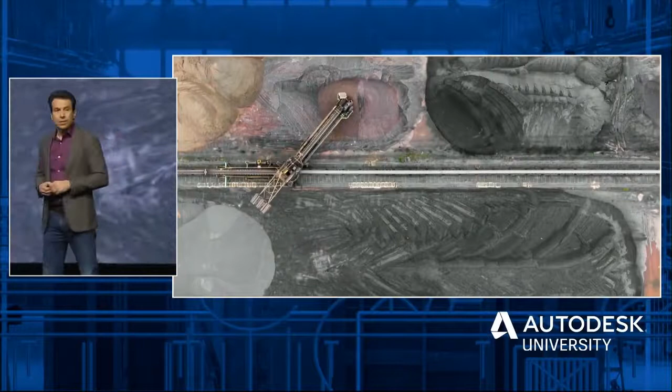On the one hand, we know that a growing population is inevitable, as is a world with more automation, because so much more is needed. But at the same time, we fear there will be fewer jobs and less of our planet's scarce resources. So what do we know about our future with any certainty? We know that more and more people are joining the middle class every day. Over half the global population can be considered global middle class today.

Now, I know there are many definitions of what middle class is, but whatever your definition, the fact that 4 billion people enjoy mobility and prosperity is enormously good news. But with this increasing prosperity comes increasing demand for more housing and hotels, more automobiles, and more airplanes. We know that more is inevitable. Yes, as we make more things for more people, we also know that we create more potential for negative impact. And making all we need with less harm to the planet and to people is a reality that we all need to face up to.

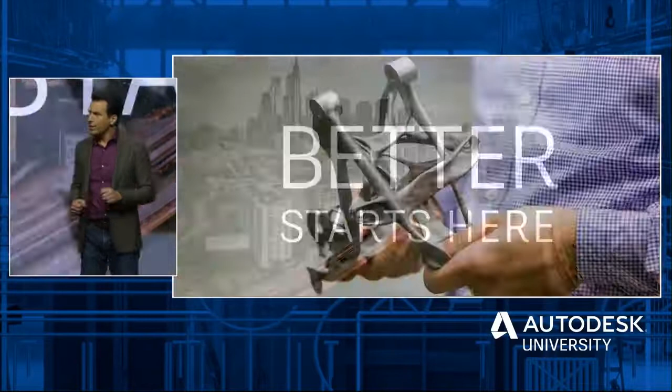So how can we solve a problem of such enormity and such complexity? It's a massive challenge, but it's also a massive opportunity, especially for all of us here in this room. I believe that better starts here. And let me tell you what I mean by better and how technology can help us get there. There are 3 areas I think we all have an impact on, and they're all completely interrelated.

First of all, we have the opportunity to better use the world's energy and materials. You've heard me talk about using less, and yeah, that's part of it, but it's also about better. More renewable energy and more circular materials. Our energy and material choices ultimately impact people. But if we can make our dependence on fossil fuels a thing of the past and build a world where people everywhere benefit from clean air,

better is also about the health and resilience of the entire population. That means designing products without harmful materials that compromise our safety or using supply chains that compromise people. It means designing buildings that prioritize health and well-being, and designing cities that are resilient in the face of climate change.

And finally, we all know that automation is changing jobs, but it's also creating the opportunity for more meaningful work, better work, and a path to prosperity for more people. Together, we have an opportunity to create a more sustainable, more equitable, and more prosperous future. A future that's better for the growing middle class, but also for those still striving to get there.

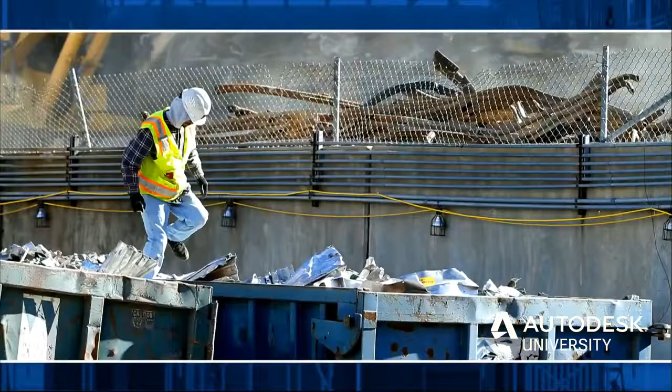So let's take a look at what these 3 aspects of better look like in construction, manufacturing, and media and entertainment. Now we'll start with construction. Now we all know today construction creates about 1/3 of all global waste. If we are to build what our growing population needs, we can't keep wasting energy and materials the same way we do today. We need to fundamentally rethink the way we build.

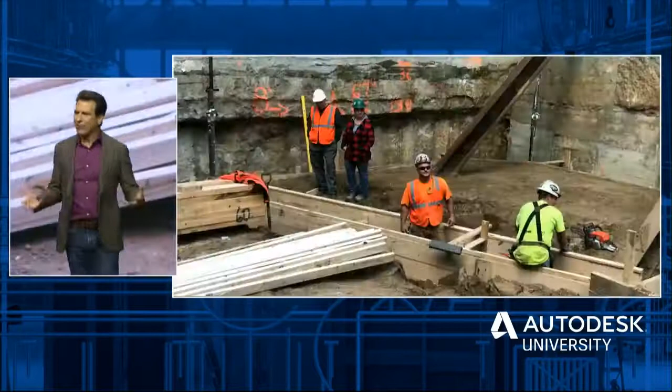Now, one company doing just that is Marriott. Marriott is the world's biggest hotel chain, and their revenue is increasing, their pipeline is growing, they're opening more properties than ever before. There's just one problem. Marriott has a huge bottleneck. They can't build what their growing business demands. Now, why is that? Because half of the US construction workers are now over 45. And the job is seen as just too dirty, dangerous, and dull to many younger workers.

This lack of skilled labor over the last decade is why the average US hotel has taken longer and longer to build. So 5 years ago, Marriott set out on a journey to learn how modular construction could help. Since 2014, they've built more than 30 low-rise modular properties, and the last year, they were ready for a big leap. At 26 stories, the Nomad Hotel in Midtown Manhattan is certainly big, as is the $65 million Marriott is investing. It will be the world's tallest modular hotel. But this isn't about creating a big hotel. It's about creating a beacon for the whole industry.

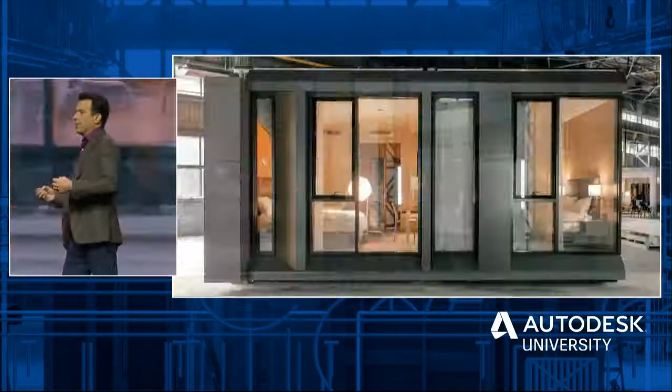And their partner for this is Skystone. Now, back in 2014, Skystone was a pretty small company, but the way they thought wasn't. They design modules that are volumetric. This means they get fully fitted out in a factory with less material, less waste. And they make them as steel frames, which means they're more configurable, and less concrete is needed to install them together on site. In theory, the economics stack up just as well as the modules themselves. But theory only gets you so far. Skystone wanted to put this into practice using automation to drive efficiency across all phases of the hotel's construction.

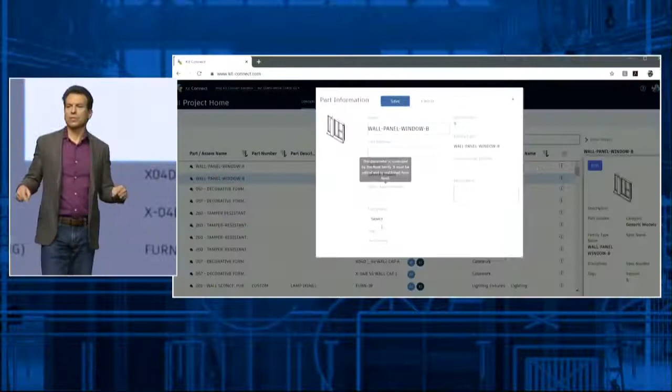And central to Skystone's automation effort is Revit. They used Revit to develop a library of parts that can be mixed and matched to spec, using a service built on our cloud development platform, Forge. Now that service is called Kit Connect, and it's used to publish component libraries to the cloud from where they can be assembled and configured into a single central model.

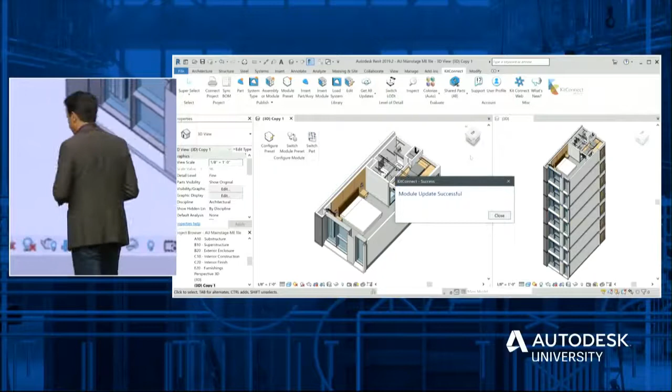So if a component like a window is swapped out, the bill of materials for each module remains consistent and accurate, because the changes propagate through the Revit model and to any other tool referencing it, like BIM 360, which Skystone is using to share 3D documentation across all phases of the project, making all the information available to all the trades when they need it. And Skystone has just started to use our pre-construction tools to keep their bidding as tightly managed as their factories.

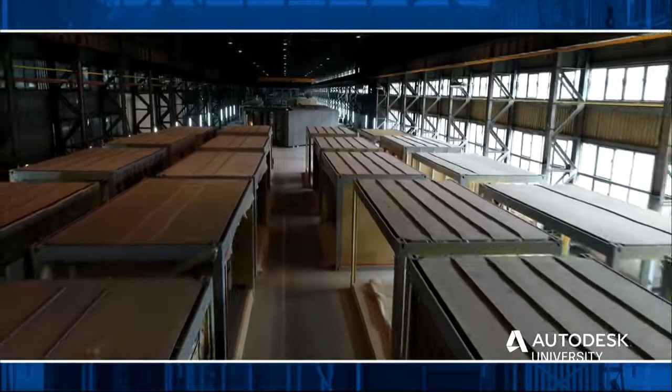As Marriott scales up its investment in modular, so Skystone has to scale up its manufacturing in parallel. These modules aren't constructed, they're manufactured. There's an assembly process, a supply chain, and tight quality control, with less waste, less cost, and less risk. They're using robots for what robots are good at, the dirty and dangerous job of welding the steel frames, and they're using people for what people are good at. Like, for example, the high-end finishes in Marriott's modules require people's expertise and attention to detail.

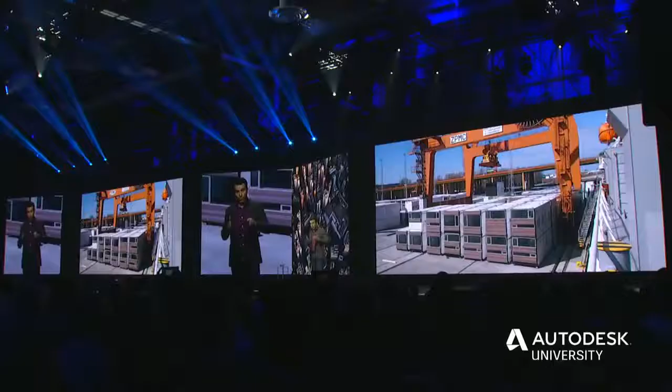All 168 modules will soon be on a single container ship on their way to the port of New York. From there, they will be trucked overnight, one by one, to a plot that is just as tight as the rest of Midtown. So tight, in fact, it would be really difficult to get traditional materials onto the site. But trucking them in from the port is straightforward, as is craning them into place, hanging them off the concrete core, and hooking them up to the services. Over half the work is still done on site, but the work has changed for the better. It's simple, it's predictable. Now, the Nomad Hotel is on track, it's on time, and it's on budget, and it's due to open next year.

Now, all building projects involve the juggling of energy and materials, of time, cost, and quality. And Skystone has partnered with Marriott to build hotels of better quality in less time with less cost. But beyond that, there's also less disruption to the neighborhood, less noise, less dirt, less wasted materials. And because each module is insulated individually, they're quieter, and they're more energy efficient. Because of the building's performance, Marriott qualified for a floor space credit. The city granted them an extra 5,500 square feet that will become a rooftop bar. It'll make the hotel more attractive, bring more guests, and more revenue.

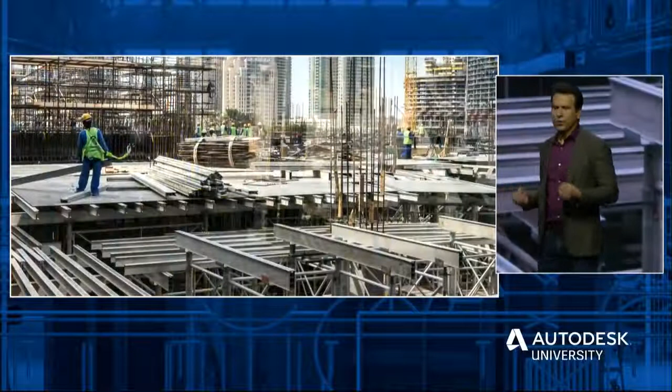Now, maybe you're not building high-rise hotels, but if modular can do this for Marriott, just imagine what it could do to help you use energy and materials more efficiently. You know, rethinking how we build the new hotels, new housing, and new infrastructure is very important, but it's just one part of a larger system. We also need to rethink how we repair our existing housing and our old crumbling infrastructure. At the same time as we build the new world, we're going to have to rebuild the old.

Now, to talk to you about this, I want to invite up the CEO of Build Change, who is bringing economic health and resilience to communities around the world. Please welcome Elizabeth Hausler.

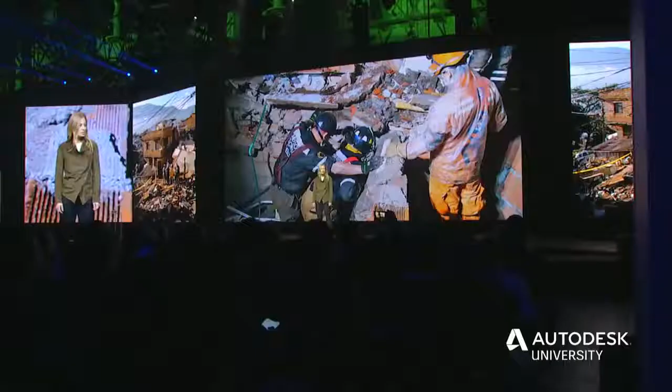A couple of months ago, a house collapsed in Medellin, Colombia, killing 3 people. There was no earthquake. It was just a normal home, just more heavy and less reinforced than it needed to be, just like hundreds of thousands of brittle brick buildings throughout the emerging world. But a house collapsing under nothing but gravity loads is a canary in the coal mine.

Because when a house like this collapses, the people who live there lose not only their home, but also their source of income. In places like Medellin, families often run a business, like a store or a restaurant, out of their home, or maybe they rent out a second story for income. When the big one hits Medellin, or Jakarta, or Manila, or Bogota, or Guatemala City, or Tehran, the loss of life, the loss of housing, the loss of economic progress, the loss of social progress will happen on a much larger scale.

What's this got to do with me? I grew up in a small town outside of Chicago, and my dad built houses. He owned a small construction business and worked for 50 years as a brick mason.

And he and my mom are here in the audience. Thanks, Mom and Dad.

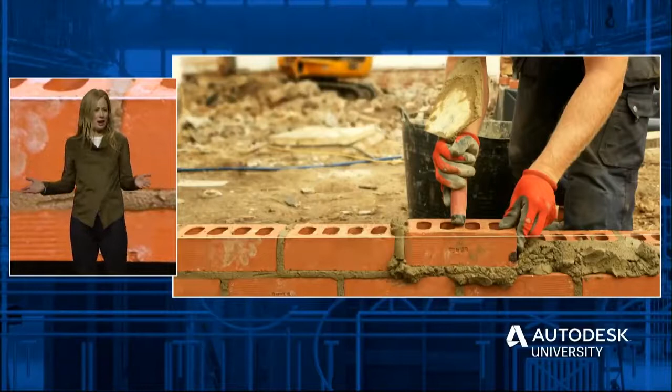So guess what my sister and I did for our summer jobs? We laid bricks. We built houses, just like my dad. I loved working with my hands, building things, being out in the fresh air, telling jokes on the construction site. Andrew, I didn't find my construction job to be dirty, dangerous, or dull. I could see what I'd accomplished at the end of the day. We'd built a home. We worked hard for my dad, and goodness knows he worked hard for our family.

Neither of my parents had the opportunity to go to college, but for us, they saw a college education as an opportunity of better. They encouraged my sister and I to become engineers. When I was in grad school studying engineering, completely enthralled by the science and technology behind preventing buildings from being damaged in earthquakes, I found myself still looking for purpose.

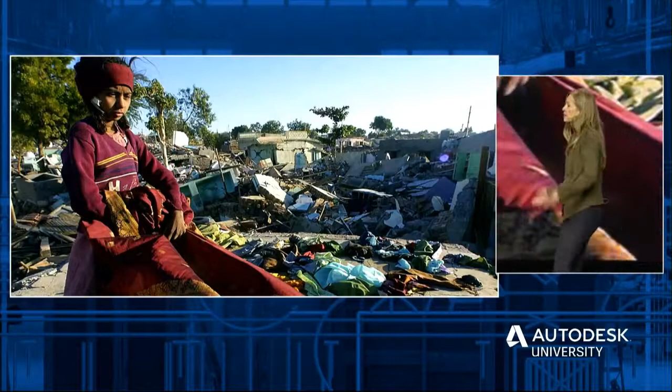Just then in 2001, an earthquake in Gujarat, India, killed 20,000 people. That's 4 or 5 times the number of people in this room, gone in less than a minute with no warning. And the majority of those killed, women and children. Most people died because their unreinforced stone masonry building collapsed on them. This is a man-made problem. I realized maybe I could help. Maybe I could use my engineering and my construction skills for good.

I spent a year in India on a Fulbright fellowship, an idealistic engineer, thinking, of course, we can design and build disaster-resilient homes. But as I wandered around villages talking with homeowners, I realized that it wasn't that simple. I met families who had been given geodesic dome homes. Geodesic domes are great for earthquakes and wind, very secure. But they're not easy to live in. They don't have enough light. There's poor ventilation. There's no ability to divide the interior space.

I met homeowners with contractor-built houses who still slept outside 10 years after the earthquake because they were excluded from the design and construction process. They couldn't trust that their house was built safely, that enough cement was used in the concrete, that the structure was sound, that they could sleep at night.

We need to understand the materials and architecture that work for the culture and the climate and the client. If we are to build healthy and resilient communities, we need to respect how people want to live here and now. We make small changes to existing building types to make them safe and usable to the people living in them. Simply, we need to find solutions people want. Isn't that what designers do?

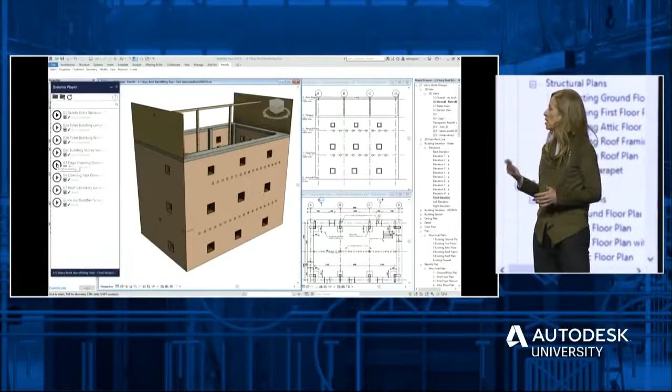We asked ourselves, how can we work with technology available now to make every step of the design and construction workflow shorter and more efficient for both new housing and for strengthening existing housing, retrofitting, where every house could be a little bit different. Today, using Revit and Dynamo scripts, we can automate retrofit design for like types of buildings. We code in Dynamo the structural engineering retrofit rules and use Revit to produce a complete design, a 3D model, bill of materials, cost, and construction drawings.

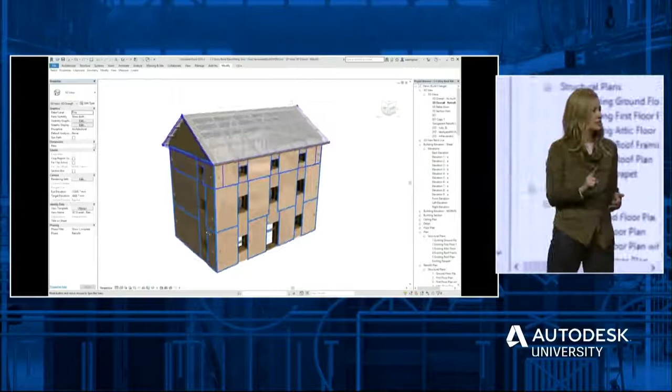What once took our team of 3 people 4 to 5 days now takes 1 person 3 hours. That's 97% less time. Even if every house is a little bit different, the design process is automated. But we think we can do even better. Here's what we're doing next, and this is really exciting. We're using artificial intelligence to change how homes are assessed.

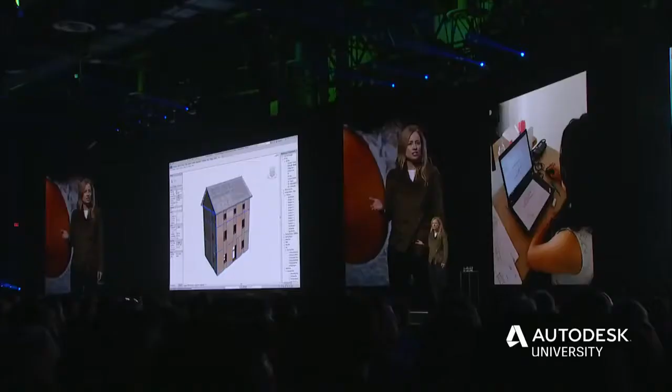It's time and resource intensive to send engineers and architects to visit every house, to make structural assessments, to measure the dimensions. We built a tool that uses AI to quickly assess whether a building can be strengthened or retrofitted. The tool uses photos that the homeowner takes on their smartphone and uploads to our cloud. It looks at things like the continuous length of solid wall, the proximity of wall to the corners, the length of wall between openings. We've trained the machine through image capture, and all that data then tells us if it's possible to retrofit the home.

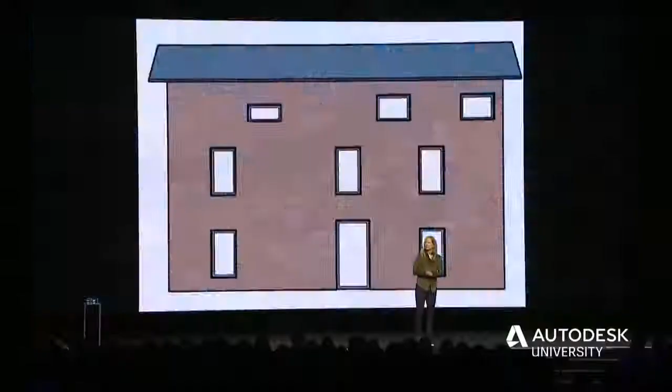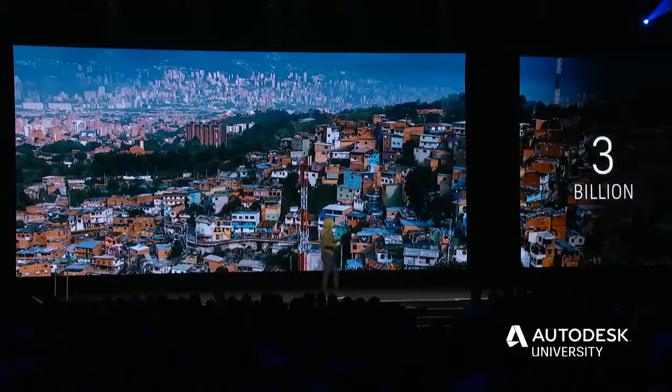These technology advances are key to scale, scaling our efforts and scaling our impact. Why? Because the World Bank says that 3 billion people will be living in substandard housing by 2030. 3 billion. That's 1/3 of the world's population. We're not just talking about the poorest of the poor. Lack of access to safe, resilient housing affects the bottom of the pyramid, up through the middle class, in our markets in Asia, Latin America, and Caribbean. If we're going to address the need for safer and better housing, we must move quickly, and technology is the key to unlocking that problem. The quicker we can assess and design a home, the quicker we can get to construction, and the quicker people can live safely in that home.

And that's not all. We'll bring better housing, but also better work to these communities. Local construction workers can access skills training and job after job after job to support their families, enabling them to build their own livelihood. But we have to be cautious here. Let's not let technology eliminate people from the design and construction process. Let's use it to enable them to make the choices that are right for their family. Using virtual reality, the homeowner can walk through the Revit model of their home and make design decisions, truly keeping those who will live in the home at the center of the design process.

Back to Colombia. Technology alone can't save the world. The government of Colombia knows that retrofits, strengthening homes, will help support their citizens. They know that preventing a disaster costs less than 20% of the cost of rebuilding after one. And they plan to invest more than $3 billion in government funds for housing. But we want to be sure that's safer housing. In partnership with Build Change, that investment can be taken much further.

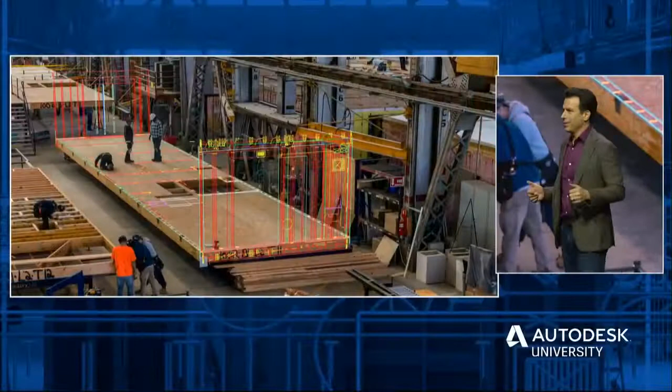So our material choices can put the health of entire communities at risk, or they can make these same communities more resilient. We have to make better choices in building projects and in all of our projects, because these choices ultimately impact people. Now, perhaps nobody knows this better than Volkswagen. The last few years have been dark times for Volkswagen. The emissions scandal was a difficult chapter in its history, but they've learned lessons from their past, and they are reimagining their future around electric.

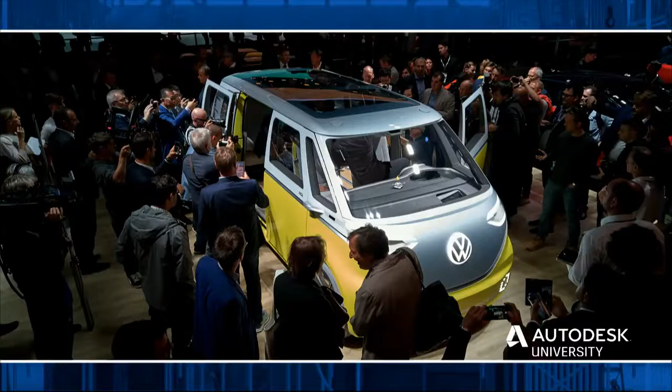They're spending $50 billion over the next 4 years to build electric vehicles. They plan to put 22 million EVs on the road by 2028. And one of the first of these is the long-awaited successor to the VW van, the ID. Buzz. It's really a beginning of a new chapter for Volkswagen. And to launch this effort, the team at Volkswagen wanted to do something to bring their past and their future together.

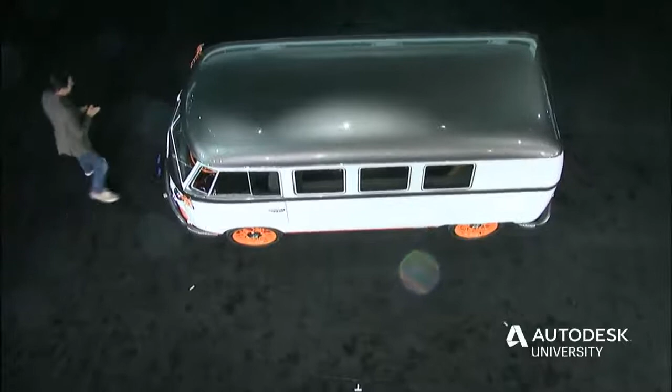Now, for those of you of a certain age, this probably brings back memories. Hopefully, most of them positive. I know I had friends that had one of these, at least a couple of friends, and we spent lots of time driving around in these things. You know the engine's so simple you can fix it on the road, no problem. It's just an air-cooled engine. Not this one, this is electric, but it's a fun car to take on a road trip.

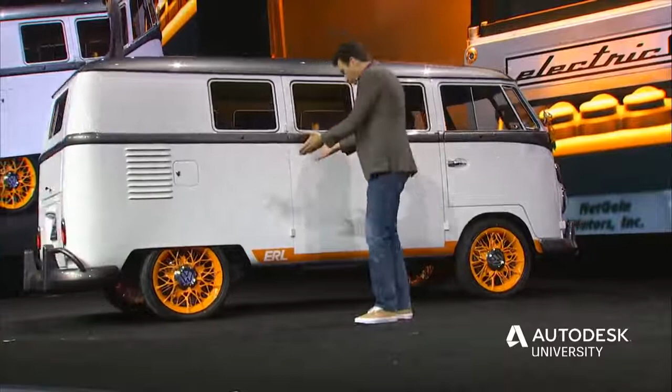So here's what they did. They took this 1960s bus and they retrofitted it with an all-new electric drivetrain. Now, they also know that going electric also means a heavier vehicle. So they wanted to explore how it could be lightweighted. So we worked with Volkswagen to reimagine one of the most fundamental parts of any vehicle, the wheel. Yes, we thought we'd help Volkswagen reimagine the wheel. Now, these particular wheels are 18% lighter.

But beyond that, and more importantly, we helped Volkswagen reduce the time to design and manufacture them from 18 months to 6 months. The traditional route takes so long because the process is relentlessly linear. First, the designer sketches out her new idea, one sketch, one idea, and from this single idea, the designer gets equally singular engineering input, and it's this linear process that eats up so much time, pushing ideas and input between departments, back and forth between design and engineering.

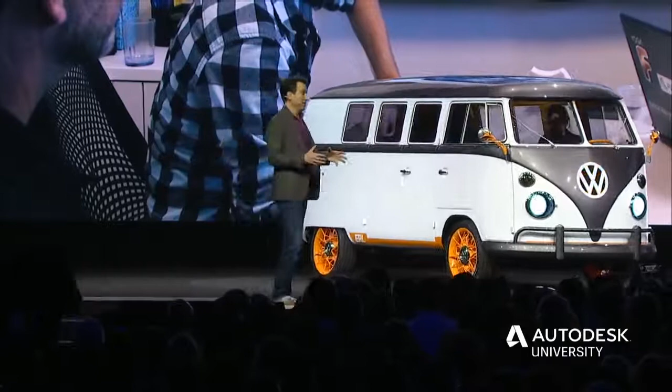What if Volkswagen could flip this process around? Instead of sketching out an idea, drawing lines to describe it, and then getting engineering to use their simulation expertise to discover how it would perform, what if instead the two teams could work together to discover the design?

That's exactly what they did. Their designers worked with the engineers to describe the problem, the goals, the constraints, the forces at play, and generative design helped them discover what was possible. The engineers described the load cases and physical constraints up front, and the designers sketched a set of initial shapes that helped guide the wheel's eventual form.

They evaluated dozens of possibilities. They made several prototypes at our Autodesk technology centers, and all of this gave them the confidence to print 3D molds that would allow them to cast the wheels in aluminum. They were able to prove out that this approach was viable.

Now, of course, Volkswagen knows if they experiment with something like this and put it into scaled production, that it's going to impact their supply chain. But they also know that changes to their supply chain will be playing a significant role in their new future. Volkswagen's investment in generative design hasn't just changed the parts they make, it's changing their vehicles, their supply chain, their entire ecosystem.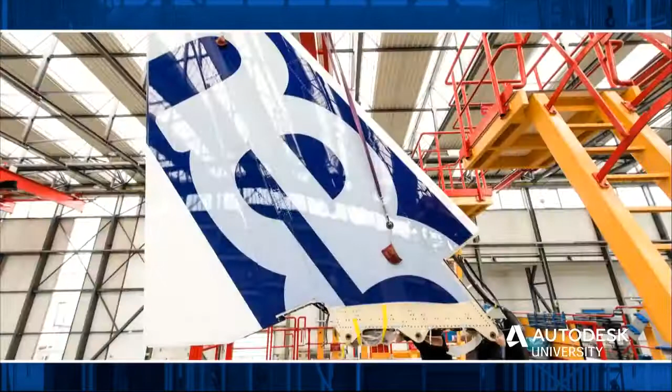Now, one company that has been thinking about this is Airbus. You might recall that 4 years ago, they used generative design to make a partition that was half the weight of the one it was designed to replace. This potentially saves 500,000 tons of CO2 every year. And from this important interior component, Airbus has moved on to optimizing critical exterior components. And they've started with the vertical tail.

Everybody knows how important the tail is. They optimized its leading edge to be as stiff as possible and to weigh as little as possible. And because the vertical tail is critical to how a plane flies, they also designed it to be impact resistant. And now they are looking at what they've learned on this and figuring out how to apply it to the wing. All of this grew out of the work Airbus and Autodesk did 4 years ago.

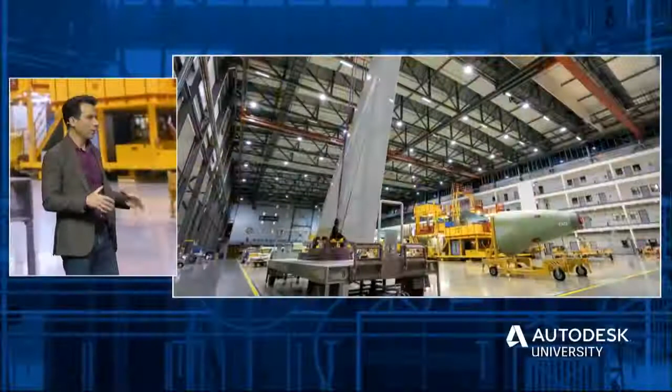And today, we are working together to figure out how automation could help Airbus with a much bigger challenge. From their early work on structural optimization, they've shifted their focus to systems optimization, from parts like these to the processes that go into making them in factories like this one, where the A350's wings are assembled.

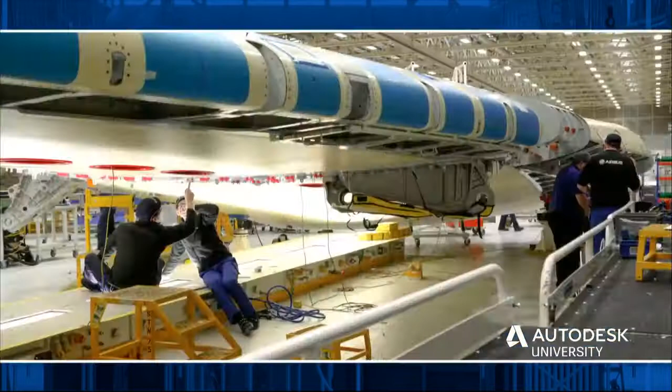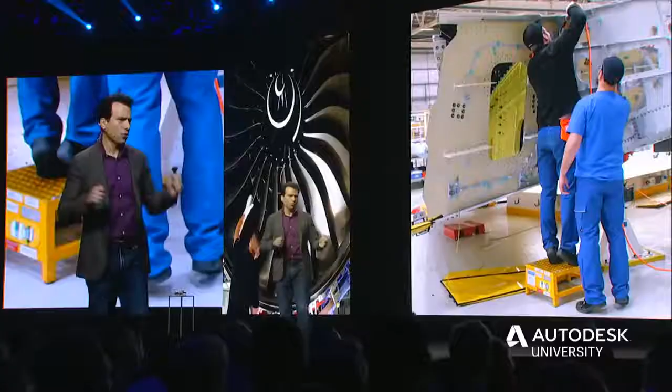Production of the wings involves sophisticated processes, like carbon fiber layup. But the assembly line is a different matter. It involves a lot of human labor, drilling, cleaning, bolting, riveting, sealing, and all these different tasks require different tools. Going back and forth between the wing and the tool trays, the carts and the storage racks involves a lot of walking. And while this walking might feel like work, it really is not work at all. It's simply activity.

So we helped Airbus see how one bay could be configured for multiple wing types. They used generative design to explore how tools, locations, and configurations could be optimized for this process, as well as all the processes for all the variations of the wings from the different generations of the A350. We managed to reduce the distance of the key travel paths while also minimizing congestion and bottlenecks.

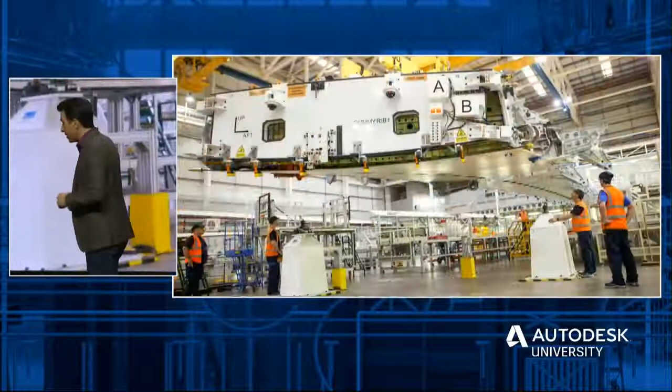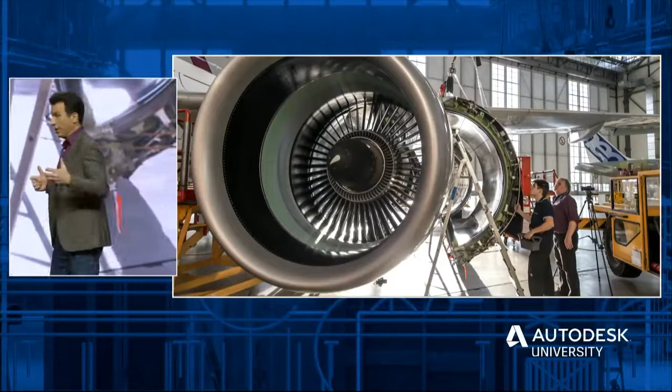Now, the line workers are absolutely getting in their daily steps, but they're also spending more time assembling the wings. It's a more productive factory and a more configurable factory. But this was just a proof of concept for something much bigger and much better. Airbus is now using generative design to optimize an entirely new factory for installing engines. It will open on its campus in Hamburg, Germany, just next year.

And they embarked on this complex challenge for one very simple reason. The most favorable site on their campus is triangular. And the plot's smaller than Airbus would like. These are not ideal constraints. But Airbus knew that this shouldn't constrain their thinking.

So they explored two paths. One path examined what a bigger building with a triangular footprint might look like, and the other path explored how the same factory might be optimized to fit into a smaller rectangular footprint. Whichever path they eventually choose, Airbus knows that the factory's form should follow its function.

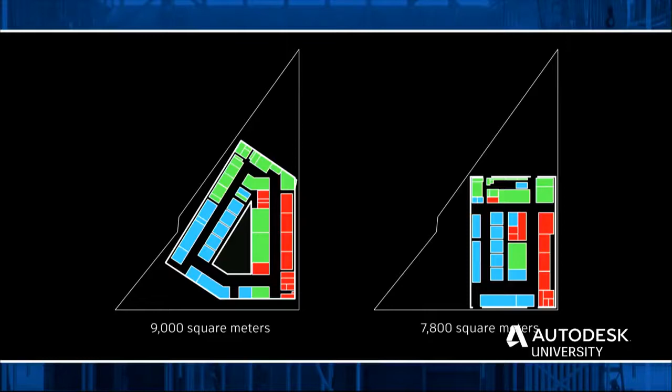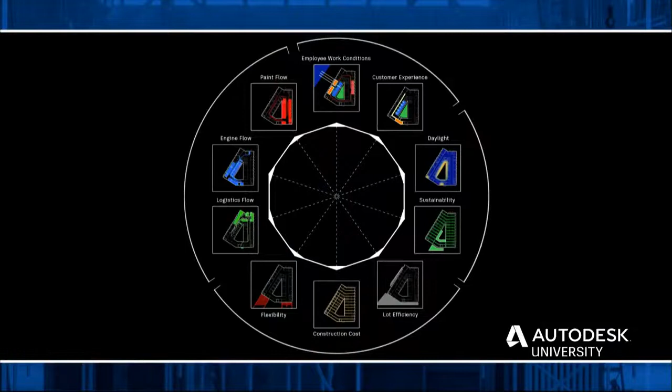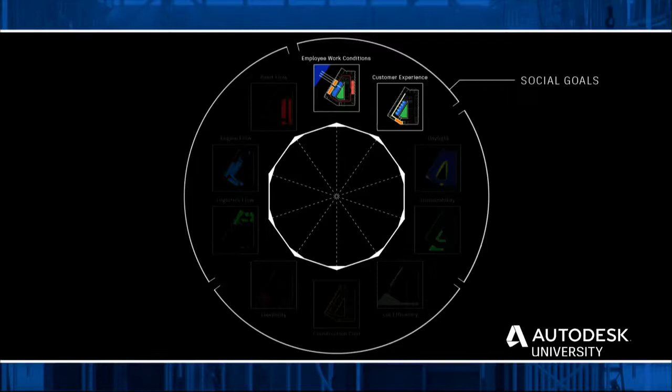So they identified 10 different sets of variables to optimize for. Variables that covered the social, the environmental, the financial, and operational aspects of its design. The social aspects of the factory were absolutely a key consideration, as Airbus wanted the best conditions possible for its workers. And like so many of you, they wanted a building with the best possible environmental certification. But the factory needs to be affordable as well as sustainable.

So Airbus considered the major financial drivers, the number of unique structural members, the length of these members, and the building's overall footprint. Cost matters to all of us, but what's really critical to Airbus was the way the factory operated. So they looked at the operational drivers, the different flow paths through the factory.

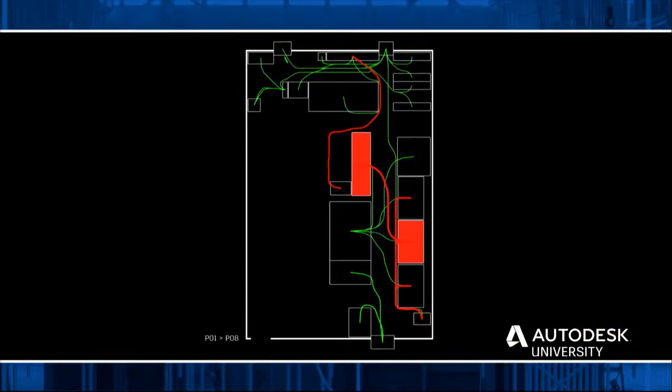The green lines you see represent the logistics flows, the loading and unloading and prepping of them and inspecting them. The blue lines represent jacking, jigging, and the many parts that need to be assembled. The red lines are the parts being moved through the different paint booths. We helped Airbus look at all the different flows of people and parts between these three key areas.

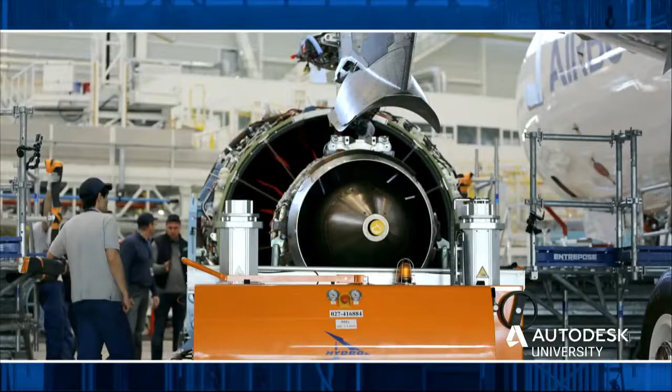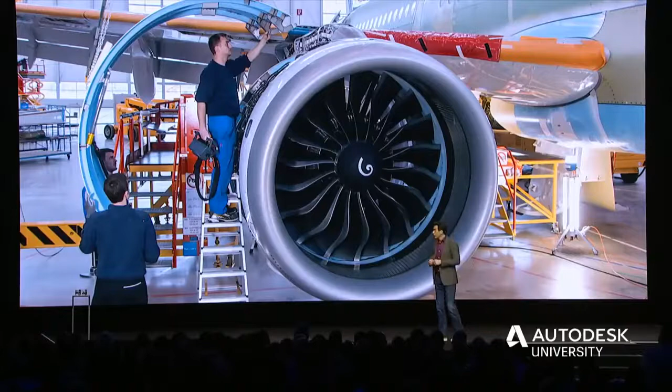Airbus was able to evaluate hundreds of options, and from these, Airbus chose several designs that looked promising. And then the team narrowed it down to these two. Both have better flow scores than the existing standards. So either factory functions more efficiently. The engines are installed more quickly, the logistic flows are more efficient, and so are the workers, because they take fewer steps each day. Overall, this one scored 40% better than the baseline.

This one has a smaller footprint, which means that it fits squarely on the constrained site. And both options are less costly. So now they just need to choose the one that suits them best. To build a factory that creates more prosperity for the company and better conditions for its workers. It's a space where everyone can prosper.

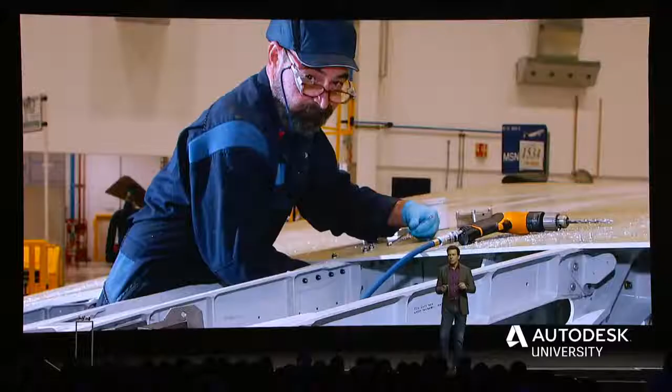Technology can help us create a more prosperous future, but we need to create better experiences for people as well. Now, we've talked about better hotels, better housing, better cars, better airplanes, and better factories. Now, how might all of these things come together in a city-scale system where people's experiences are not just better, they're happier? Now, here to talk about that and creating the happiest place on earth is Asa Kalama, Executive Creative Director at Walt Disney Imagineering.

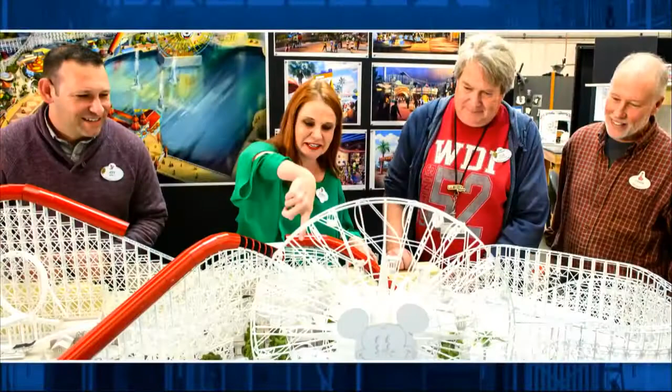My role as creative director involves working alongside incredible artists, architects, programmers, and prop builders to design and make experiences that are truly fantastical. And it is a distinct privilege to get to help an idea grow from a tiny napkin sketch into something this big. But big really doesn't do it justice. Take Walt Disney World, for example, in Florida. It's 43 square miles. That's twice the size of Manhattan.

It is truly massive, home to 4 theme parks, and each theme park is really a small city in and unto itself. And like Andrew said, the street-level experience is just one part of a much larger system. Because like all cities, there is an incredible amount of unseen infrastructure. We have our own power plants, water plants, our own transportation systems. But unlike all cities, ours are home to mystical jungles, old western towns, and of course, fairy tale castles.

Creating these city-scale experiences is a massive design challenge. But today, I want to show you something we've built that's even more massive. I want to take you behind the scenes to show you what it takes to build a galaxy.

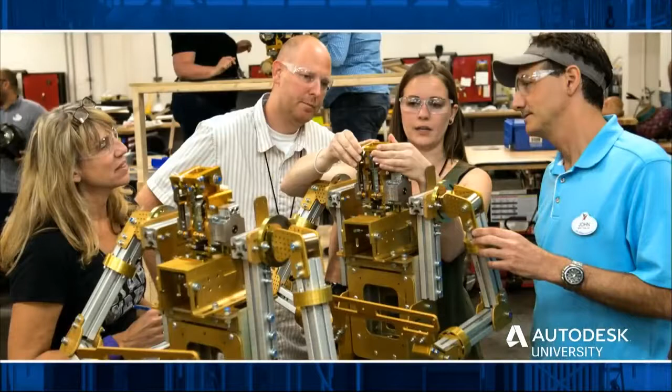The largest of these is over 100 foot long. It's the Millennium Falcon, which guests board on a wild, interactive smuggling adventure. And to put that scale in perspective, if it were placed on its end, it would actually be taller than Sleeping Beauty's castle. And it's big because the whole experience is big, as was the team behind designing it. They were drawn from over 140 different disciplines from all around the globe.

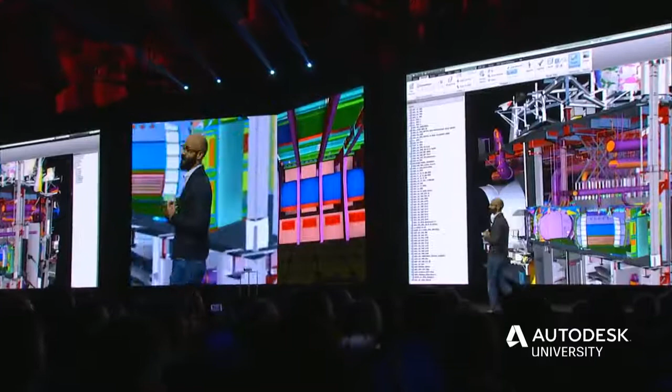Concept artists, designers, facility architects, landscape architects, interior designers, show set designers, graphic designers, media designers, ride engineers, software developers, as well as a host of amazing trade partners. A team of massive talent working across different disciplines and time zones, which is why coordinating all of their efforts was a Herculean task, and one that was made possible by BIM. In fact, the final experience that our guests enjoy today is the product of over 600 different models, all integrated into a single source encompassing design, fabrication, and installation.

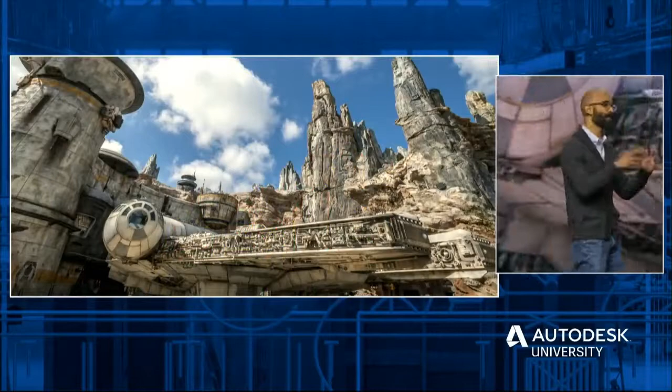Now, to give you a sense of this complexity, let's take a journey into one specific portion within the Millennium Falcon. Fans have dreamed, many of them for decades, of finally getting to step aboard the most iconic ship in movie history, which means delivering on how they've always imagined it. And one of the most recognizable locations on board the ship is the chess room. And our version needed to be indistinguishable from the films.

Like this interior set, which was just created at Pinewood Studios in London for the latest installment of the Skywalker saga. Now, the film production created a set of drawings to build from, so surely we could just use those for our attraction. Well, actually, no. Theirs was purpose-built for filming to a very different set of requirements. Our version needed to be engineered to withstand the test of time, as well as the enthusiasm of our guests. So, though we were incredibly lucky to have a set of drawings and access to the original production designer, we had to create our chess room from scratch.

There were 2 major constraints that drove our design: the structure and the interface with a ride system. The site footprint drove the overall shape of our building, and the ride system occupied a big portion of that space. This left only odd-shaped voids into which all of our themed show set spaces had to be located. It's really sort of like building a ship in a bottle.

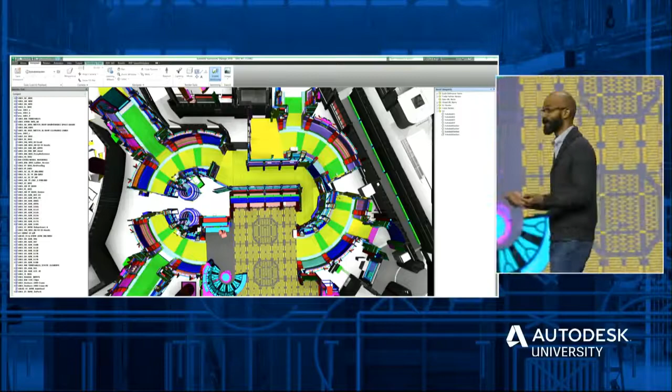The design needed to be coordinated with incredibly small tolerances. Why? Well, because an inch here and an inch there is the difference between a snug fit and an HVAC duct running right through the middle of your holographic chess table. And our show set and ride and facility teams were all in different locations, working on their respective designs concurrently.

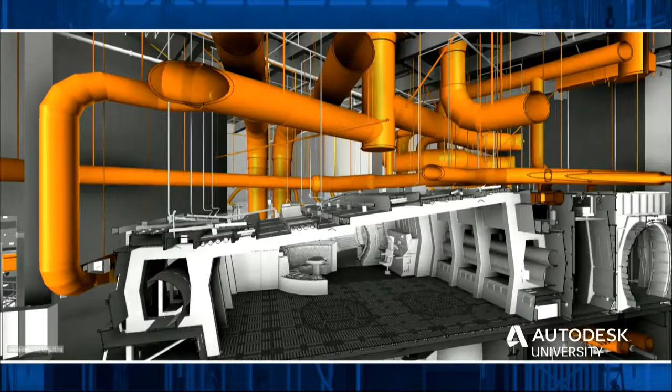Here, actually, we see the void into which the chess room was built. It's wildly irregular in shape, with a delightful steel column running right through the middle of it. Our show set team worked to squeeze the chess room in between that structural steel, the walls, all while maintaining that connection to the ride load station. Coordinating electrical, AV, fire protection, and show control systems, that was an iterative process with the design evolving over time as each discipline put more detail into the model.

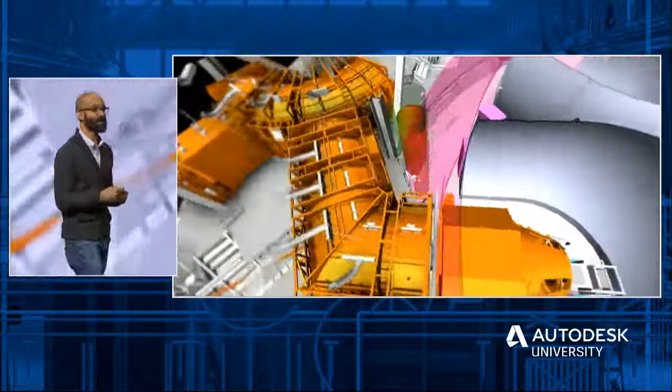And as all designs change, this one was no different. So midway through the design process, the envelope of the ride vehicle increased. But because the ride team drew that envelope in the model, we discovered it very quickly in a routine clash detection. And we were able to redesign the ductwork long before we ever got to site.

One of the other side effects of squeezing rooms into voids is that none of them are built with four right-angle walls. Okay, that's a lie. There's one back-of-house equipment room, but other than that, every other space has like five or six walls, and many of them are curved. So when you end up plotting these drawings, what you get is this largely incomprehensible mess that becomes very difficult to visualize, let alone use as a coordination tool.

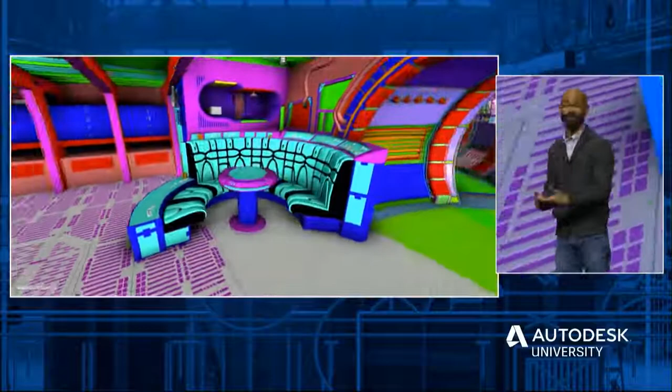So tumbling around the model became the primary way we were able to clearly articulate to each other what we were actually building and also how we were doing. I used it to track progress in real time, which allowed me to sort of refocus the team on particular issues or make design decisions to react to emergent clashes.

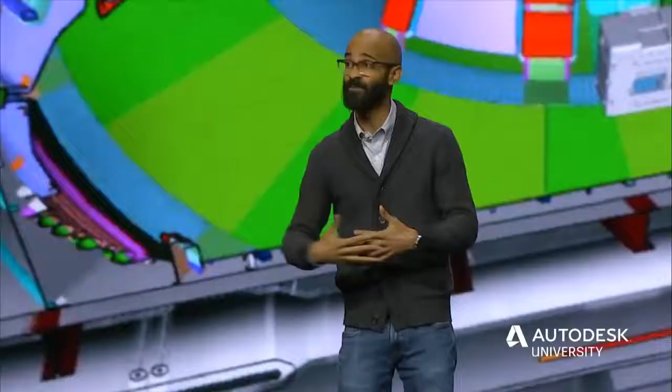I'm a creative director, but I care about construction details just as much as I do the creative vision. And so we push Revit to its limits, just like we push so many tools. And in fact, our projects are often so complex and so unique that we often find ourselves bumping up against the edges of what tools are capable of doing. And indeed, we often find ourselves creatively misusing software.

And one great example of this is Autodesk Shotgun. You might know it as a tool for tracking media assets, but we found it profoundly useful for managing our entire inventory of props and tracking our supply chain from myriad global sources all the way to the field.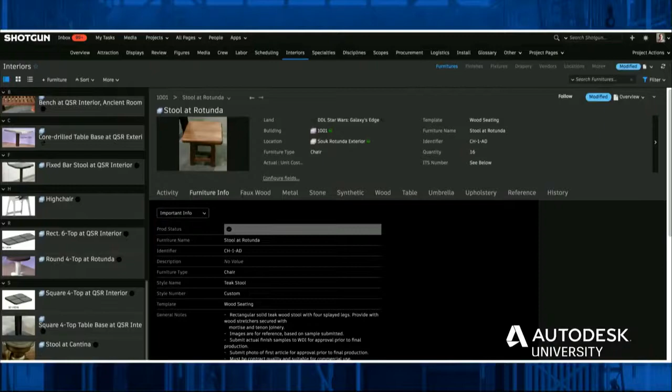But perhaps the most direct benefit of working together in a shared BIM model was velocity. We were able to collapse our sequencing and have multiple disciplines all working in parallel, often at different levels of detail, on things that would otherwise need to happen sequentially. And in the end, what this allowed us to do is deliver one of the most technically challenging attractions we've ever created months ahead of our target turnover date, which, most importantly, meant that we were able to open earlier than we had originally planned.

Because as excited as our fans have been to finally get to step into a galaxy far, far away, we have been equally excited to share it with them. And the complexity of the design and all of the advanced tools we use to build it are just that, tools. These are things that should be totally invisible to our guests. What we hope they do see is a place where they feel welcome to imagine, to create, and to play.

I mean, this is why we created Star Wars: Galaxy's Edge. To be a place where parents can share the stories they loved as children with their children, where guests can imagine themselves to be who they've always wanted to be, where a daughter can see her father as the child he once was, and where they can leave feeling like the Force is with them.

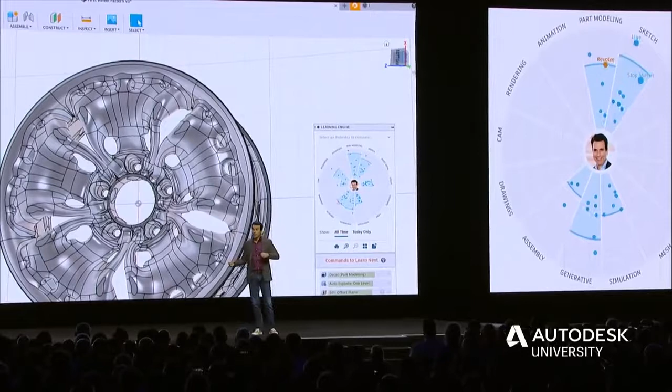So for example, at Autodesk, we are starting to bring the element of play into our tools to make them easier to learn. So you can use our software, you can see what skills you might need to learn next, and maybe you could even rank yourself alongside your peers and compete. That's what we're exploring with the Autodesk Learning Engine, bringing learning into your work environment, directly into the tools you use.

Now, you recognize that guy right there. This isn't fake. That is my command flow that I used to do the generative type workflows that VW did. I wanted to figure out how generative design worked, how to clean up the part, how to render it, how to manufacture it. And the tool helped me know where I needed to go. And it was fun. It was exciting to compete with people. It was exciting to see how I compared to others.

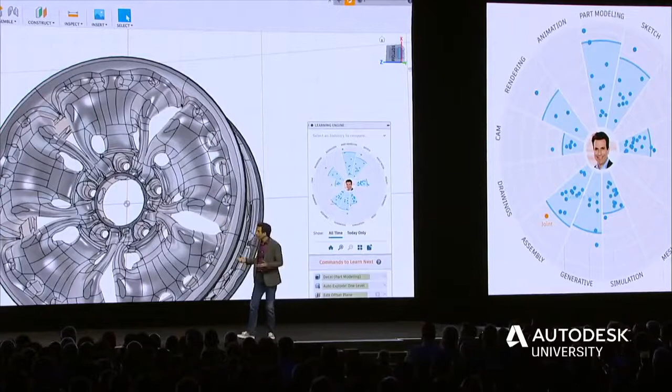It terrifies the Fusion engineering team, because now I know exactly what works and what doesn't. But it's an amazing experience to have play put into what you do every day. Now, this is just in Fusion today, so it's really early days. But over time, the learning engine is going to help you adapt your skill set for the future.

And come on, if a CEO can do it, all of you who are way better at this stuff than I could ever be can do it too. Right? You can learn lots of amazing new things while having fun at the same time. And we know you care deeply about improving your skills, not just because you're here at AU, but because you told us so in the survey we kicked off here last year. You might remember we wanted to find out how automation is changing the work you all do.

And so we commissioned Deloitte to write a report on what the future of work looks like. The report examined the demand for jobs within your industries, the skills you supply, and the ecosystems you all work in. On the demand side, the report recommended that companies invest in continuous learning and treat their workers as centers of value rather than cost centers. So what might that actually look like?

You remember the team at Volkswagen who worked on the bus, the designers and engineers? Here are the skills they used during the course of this project, mapped out in the learning engine. The designer did a lot of sculpting and surfacing. They used the more fluid and creative tools to explore form because they're designers. While the engineers did a lot of part modeling and simulation, their work is more focused on analysis and function, which is why there's this communication gap, this language barrier between their work.

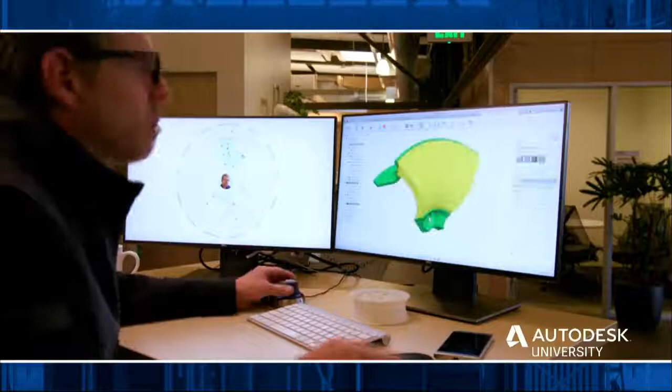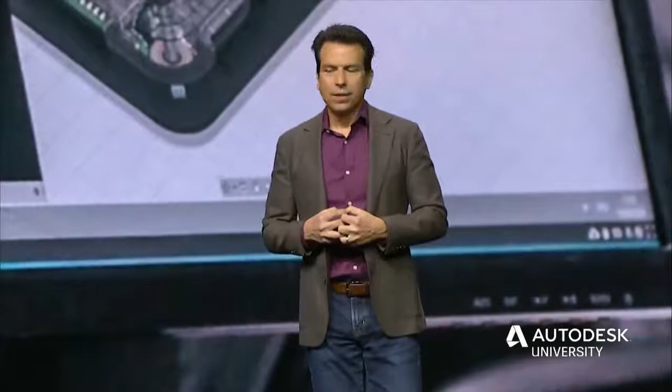However, over the course of the project, generative design gave them a common language, one where they could explore form and function together. Both the designers and the engineers could contribute to finding the best solution. And rather than pushing ideas and input back and forth across this gap, both groups grew skills over the course of the project that brought them closer together. As we continue to build the learning engine, we are changing how we think about learning.

What's more, you don't just come to AU to learn how to use our products. Many of you come to AU to certify yourselves in them as well. And now you can get certified online anytime.

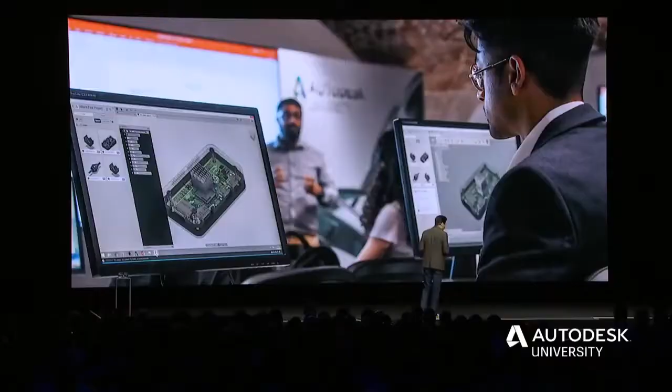All right, we're also introducing two new role-based certifications at AU this year, and we're piloting credentialed courses too. So you can be recognized for your skills, and employers can find good people to fill their jobs.

So what did the report have to say about the skills you supply? It said that our industries are seen by some as dirty and dangerous, and that in order to attract talent, we need to change the way we talk about this work. We need to give people the opportunity to see how these industries are changing and the important role technology is playing. And we want to support other organizations who are helping change these narratives, like the California State University.

We're giving them $1 million to help with a new integrated design, engineering, and manufacturing facility. This will help expose their students to new technologies that will help them develop new skills. Now, it's planned for their campus in Northridge, just north of Los Angeles, where there is a diverse learning community of almost 40,000 students, 40,000. Many of them the first in their families to go to college.

And Cal State Northridge is already giving them a leg up. The school has an incredible track record of turning adversity into prosperity. It's recognized as one of the top 10 engineering schools in the US for traditionally underserved ethnic groups. And the president of the university, Dr. Dianne Harrison, is sitting right there. Thank you for all the work you do with these populations that need what you do desperately.

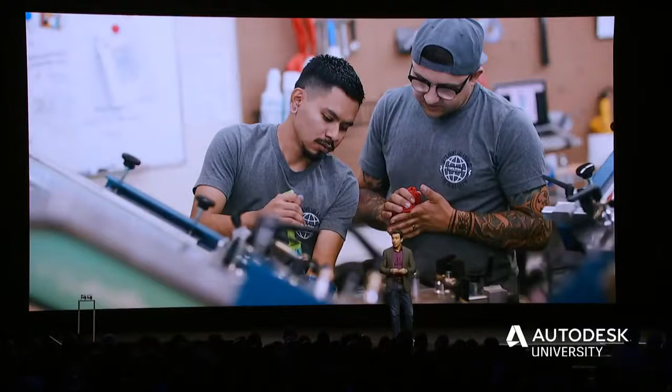You know, our investment will help them prepare their students for the future of making. But beyond that, it will increase the quality of the region's manufacturing and the quality of its manufacturing jobs. There are more of these jobs in LA County than any other US county. It's an incredible manufacturing hub with an incredibly diverse population. And that diversity will be part of the engine that helps fuel more opportunity in the future.

I believe that it's our social and moral responsibility to give everyone, everywhere, access to the tools they need to address the challenges they have. Now, we began making software free to students back in 2012. And since then, we have given away millions of licenses each year. Our goal is to help everyone learn the skills they need today to help them thrive tomorrow.

Now, finally, the report also said that the supply and demand for your skills doesn't exist in a vacuum. All of you work within a bigger ecosystem. So what can we do to promote cross-sector collaboration? Now, that's where our technology partnerships come in. There are many different disciplines represented in this room. So one of you out there is probably an architect. I know you're there. You might be sitting next to a game designer, all right? Somebody out here works in automotive or in aerospace. And you're probably sitting next to a contractor somewhere.

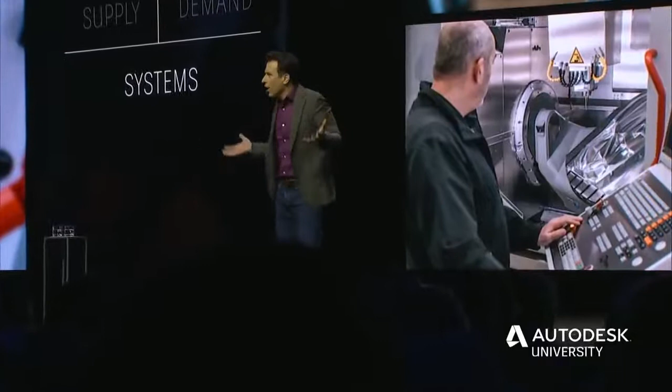What do you all have in common? You all need to unlock your data and connect your teams. Every single one of you. You all have the same coordination and data flow problems. They're just for different things. And with the Forge platform, you can create new automated workflows that add new value and help you connect those teams and data flows. Companies you work with today are already doing this.

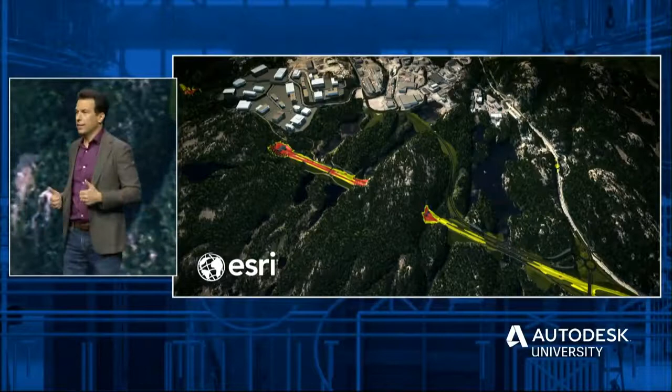You might remember our partnership with Esri. Esri has used Forge to build a bridge between BIM and GIS to help automate the aggregation and visualization of GIS data. Unity has used Forge to bring BIM data from Revit into real-time environments in one click, so that your teams can visualize and experience their BIM projects in high fidelity anytime, anywhere.

And this year, I have a new partnership to share with you. Tomorrow in the design and manufacturing keynote, we're announcing our partnership with Ansys. Now, many of you already know them well, and we know their simulation expertise can help propel our generative design technology even further. But Forge isn't just for others to build value on. It's something Autodesk is building value on as well.

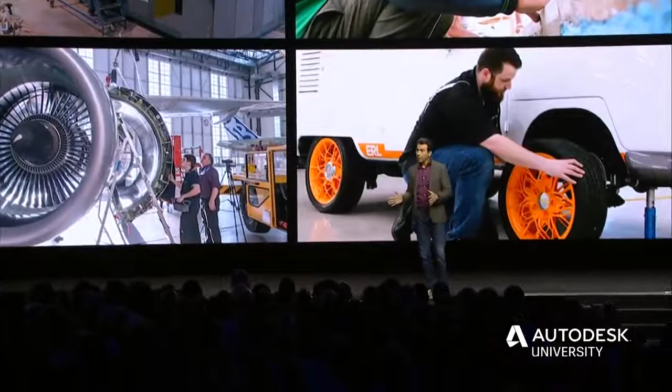And in tomorrow's AEC keynote, you'll see how we've used it to connect teams, workflows, and data across the design and construction ecosystem. One of the reasons I'm really excited about Autodesk Construction Cloud is the way it closes the loop between our design tools and our newest construction solutions. It really will help owners, general contractors, and subcontractors collaborate better in less time with less risk. All of these partnerships use Forge to build on the data that flows through your ecosystems. And organizations like Skystone, Build Change, Volkswagen, and Airbus are starting to see the value that is emerging from building on our platform.

So at AU this week, think about how automation can help you connect the disciplines you work with. And when you're in classes, look for opportunities to eliminate the non-productive. Think about how you can grow your expertise and your creativity, and focus on what adds value to you and to your business. That's the opportunity of better. That's what we're working towards at Autodesk, a platform for better. Better workflows, better outcomes, a better world.